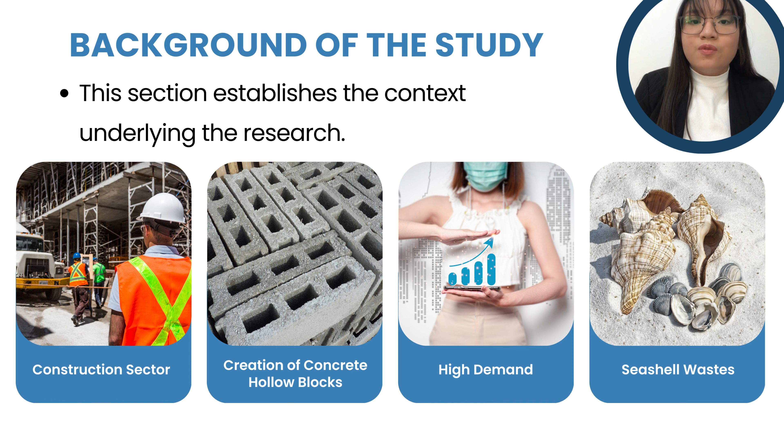The theoretical framework will be presented by Ms. Iana. The building and construction sectors have been striving to adopt environmentally friendly practices to reduce their environmental impact. Consumer interest in sustainable business has grown, and people are increasingly considering the environmental consequences of their choices. The study aligns with the theory of green purchase behavior, which explains how consumers select eco-friendly products based on their past behavior for sustainability. In this context, the researchers utilized recycled seashell waste as a step towards producing eco-friendly materials.

Our conceptual framework will be presented by Mr. Charlemagne. Let us proceed to the conceptual framework. The conceptual framework for the study on seashell waste concrete hollow blocks as an alternative to commercial concrete hollow blocks follows the IPO format, representing input, process, and output.

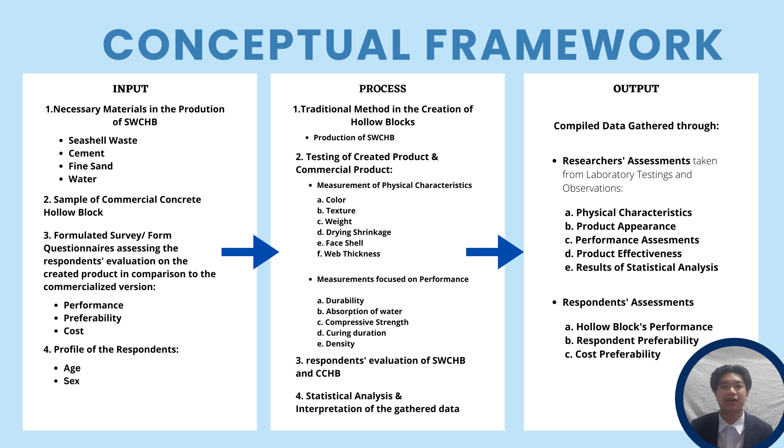The first is the input. We'll first need the necessary materials that we need in the production of SWCHB, or seashell waste concrete hollow block. These materials include fine sand, cement, water, and most importantly, seashell waste. Number 2, we will need a sample of CCHB, or commercial concrete hollow block, and this sample will be used later on in the process of the study.

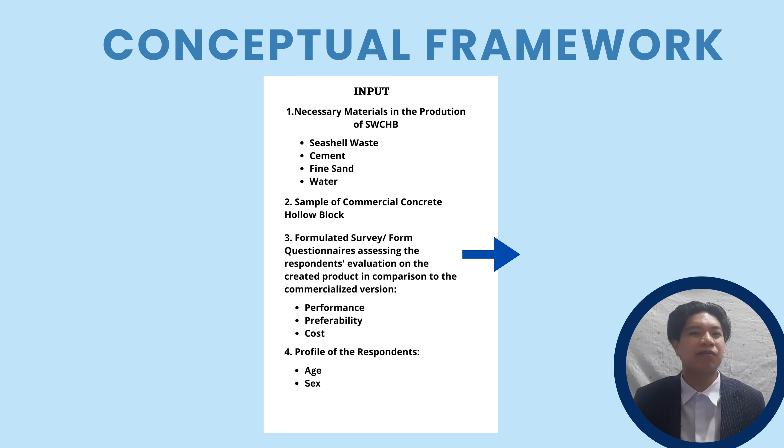Number 3, we will be formulating surveys or form questionnaires that will be assessing the respondents' evaluation of the created product, or SWCHB, in comparison to the commercialized version, or CCHB. The respondents will be evaluating the two in terms of their performance, preferability, and cost. Finally, we will have the profile of the respondents, which includes their age and sex.

Proceeding with the process, we start off with the traditional method of the creation of hollow blocks. The method will be used in the production of SWCHB. In the process, we will also test and compare the created product, SWCHB, and the commercial product, or CCHB. We will be taking measurements of both products, measuring their physical characteristics, such as color, texture, weight, drying shrinkage, face shell, and web thickness.

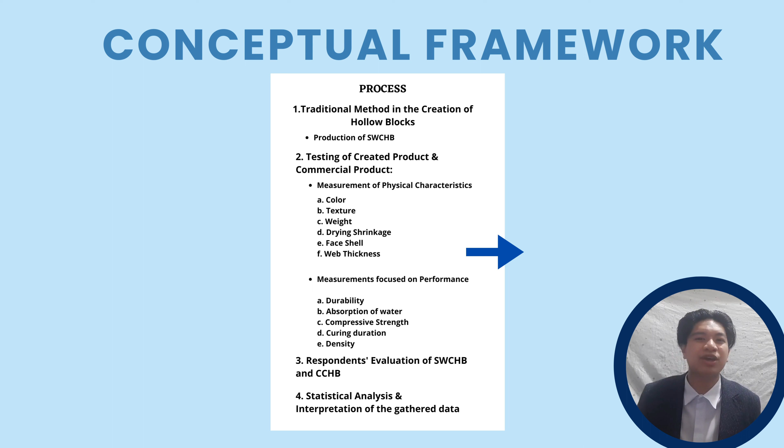We will also be measuring both, focused on performance like durability, absorption of water, compressive strength, curing duration, and finally, density. Third, we will be giving and getting our respondents' evaluation of SWCHB and CCHB, and finally, we will be getting the statistical analysis and interpretation of the gathered data.

Lastly is the output. The output will mainly be on the compiled data gathered through the researchers' assessments and respondents' assessments. The researchers' assessments will be taken from laboratory testings and observations of physical characteristics, product appearance, performance assessments, product effectiveness, and results of statistical analysis.

On the other hand, the respondents' assessments will be taken from the results of the surveys or questionnaires from respondents, which will comprise of their evaluations of the hollow block's performance, respondent preferability, and cost preferability.

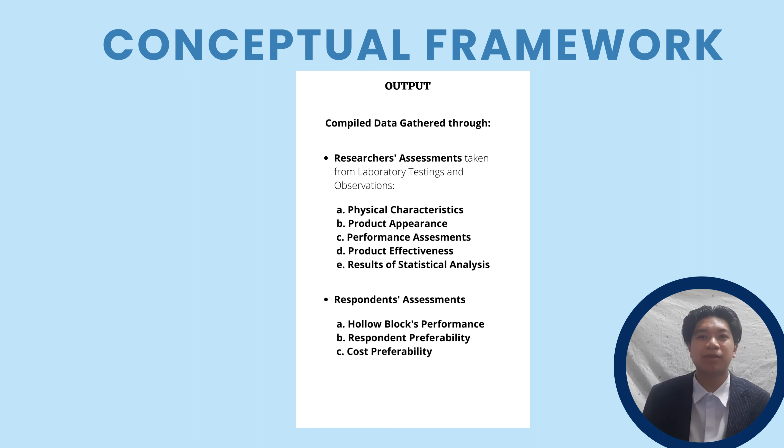The next to be presented is the statement of the problem, to be presented by Mr. Neil Dayupay. This study aims to determine if hollow blocks made from various types of seashell waste may be used as an admixture for a low-cost hollow block and alternative for a commercial concrete hollow block, CCHB. The study also seeks to evaluate which type of concrete hollow blocks is the most efficient in terms of product quality, consumer preference, and cost efficiency.

Proceeding with the research questions, to be started by Ms. Rithiel Valino. The following research questions were constructed by breaking down the main problem of the study into specific problems. The first research question focuses on the procedures that the researchers followed in gathering and preparing the primary ingredient of the seashell waste concrete hollow block, or SWCHB, which is the seashell waste.

The second question refers to the procedures in making the SWCHB and the commercial concrete hollow block, or CCHB. Third, the researchers seek to know which treatment produced the best outcome by measuring the product's durability, absorption of water, curing duration, and density. Fourth, the researchers also seek to determine the differences and similarities between the physical characteristics of the SWCHB and CCHB in terms of color, texture, weight, drying shrinkage, face shell, and web thickness.

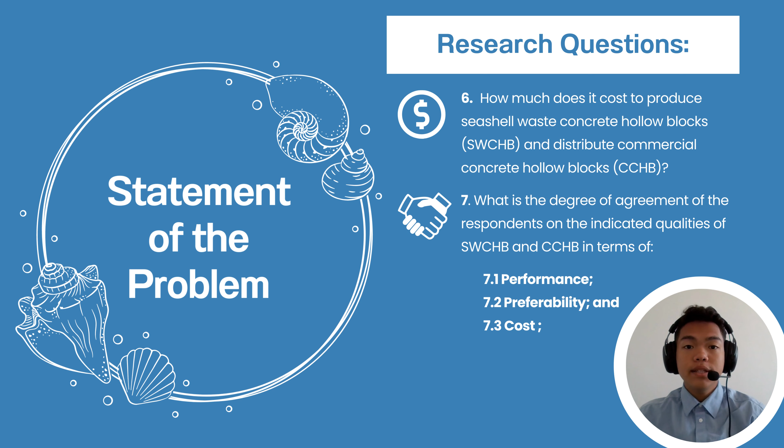Seventh, what is the degree of agreement of the respondents on the indicated qualities of SWCHB and CCHB? Qualities that is about performance, preferability, and cost. Eighth, is there a significant difference between the degree of satisfaction of the respondents based on the qualities of hollow blocks with an admixture of seashell waste, or SWCHB, and commercial concrete hollow blocks, CCHB?

Moving on to the hypothesis, which would be presented by Mr. George Tolentino. The research study compares the performance, preferability, and cost of hollow blocks with an admixture of seashell waste to that of a commercial concrete hollow block. The hypothesis suggests that there will be no significant difference between the two types of blocks.

Surveys will be conducted among potential users to gather their ratings and opinions. The data analysis will determine if the seashell waste admixture is a viable and cost-effective alternative.

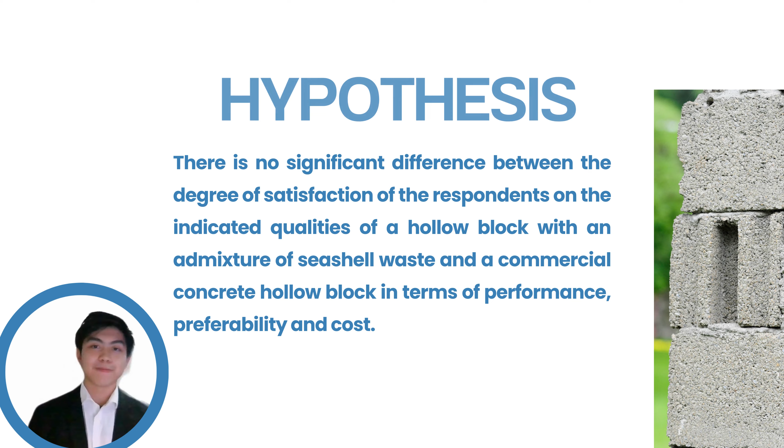Now moving on to the significance of the study, presented by Mr. Sean Pincena. The research study has significant benefits for various groups. It offers concrete hollow block manufacturers new variants for mass production and cost reduction. The construction industry can utilize seashell waste concrete hollow blocks, reducing material costs and enhancing structural performance.

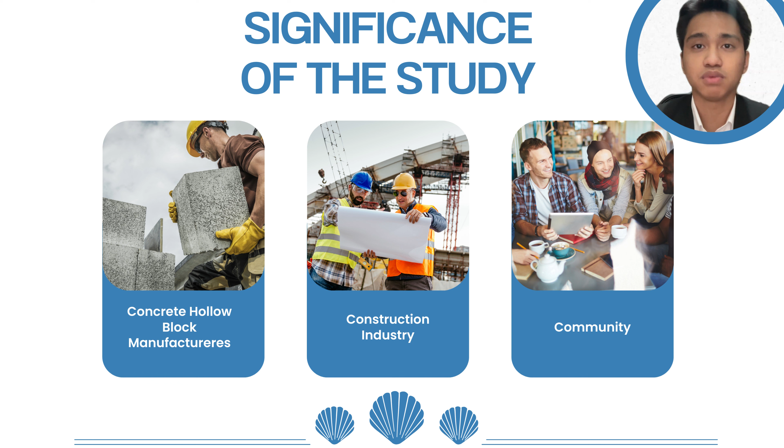The community benefits from waste reduction and prevention of odors and microbial issues. Homeowners can efficiently reuse seashell waste, reducing costs and potentially starting businesses. Future researchers can use this study as a valuable reference for related topics on seashell waste and concrete hollow blocks.

The scope and delimitation of our study will be presented by Mr. Adrian. The scope of this study focuses on developing a seashell waste concrete hollow block as a substitute for commercial concrete hollow block. The study aims to assess the products' effectiveness, qualities, and characteristics through laboratory tests, observational tests, and surveys.

The laboratory tests will include compressive strength, thermal conductivity, water absorption, and acoustic absorption. Meanwhile, physical characteristics will be attained through observational tests. Furthermore, survey questionnaires will be used to determine the degree of agreement of respondents on performance, preferability, and cost.

The delimitation of the study are as follows. The study is limited to the data gathered from the laboratory tests, observational tests, and research surveys conducted by the researchers. The response of the research surveys are limited to 15 males and 15 females residing in Qatar, aged 18 to 60, who are precisely acquainted with testing and evaluating concrete hollow blocks. The research timeline is limited to the first and second semesters of the school year 2022 to 2023.

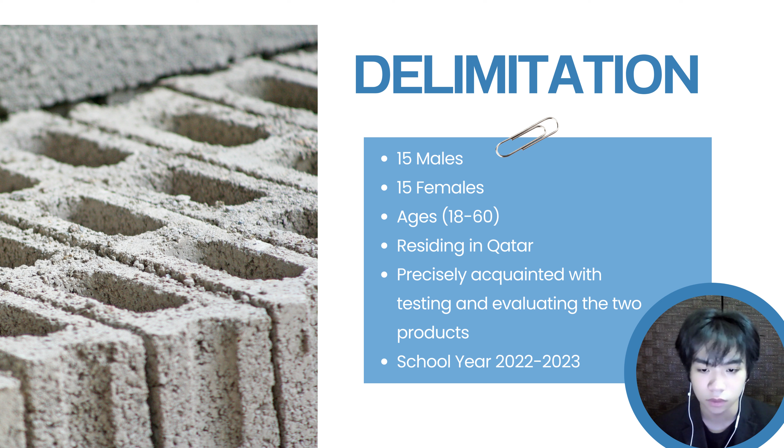As we move forward with our study's presentation, let us now shift our focus to the third chapter, which is all about research design and methodology.

The experimental method allowed the researchers to manipulate the independent variable, which is the formulation and production of seashell waste concrete hollow blocks, and examine its effect on the dependent variable, which is the performance of the hollow blocks in the construction industry. The study involved laboratory testing, evaluation by selected respondents, statistical analysis, and comparison of the results.

The locale of the study will be presented by James Binyas and Lance Tolentino.

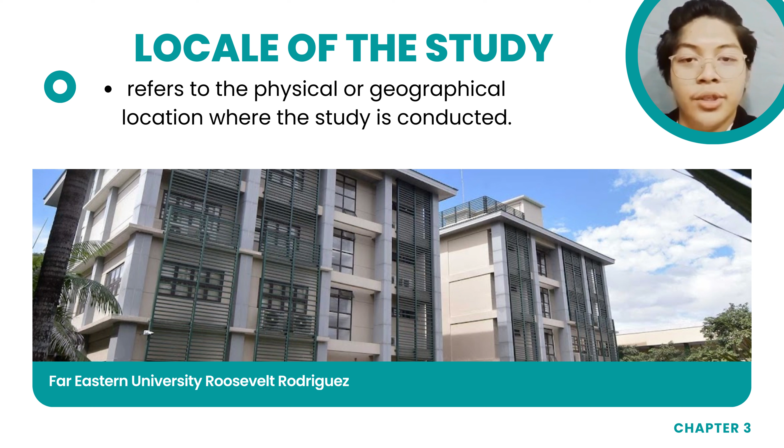Provided that we are enrolled at Far Eastern University, Roosevelt Rodriguez, the study was conducted in an online setup by offshore students stationed in Qatar and UAE. Specifically, the study was done in the Qatar Satellite Campus.

The seashell waste concrete hollow block (SWCHB) were formulated and produced in one of the locations set by the researchers to meet. Residing in Qatar, the researchers used one of the members' houses with an appropriate outdoor space to formulate and produce their desired product at Yasmin Gardens.

To ensure reliable and credible data, the study utilized Doha Technical Laboratories (DTL) in Qatar for testing the product. DTL is a renowned laboratory in the construction sector, offering a range of testing services for various construction materials.

The respondents of the study will be discussed by Mr. Adrian. Respondents of the study.

In this study, the researchers have selected respondents from Qatar who possess knowledge or experience related to the study. The study will involve a total of 30 respondents, 15 males and 15 females, ranging from 18 to 60 years old. The researchers employed purposive and availability sampling techniques. Purposive sampling involves selecting participants based on specific criteria, while availability sampling involves gathering data from readily available individuals.

The researchers' instruments will be represented by Ms. Ian. Three research tools will be used to gather the necessary data for this investigation. The instruments that the researchers will use include an observational assessment or checklist, laboratory testing, and a survey questionnaire.

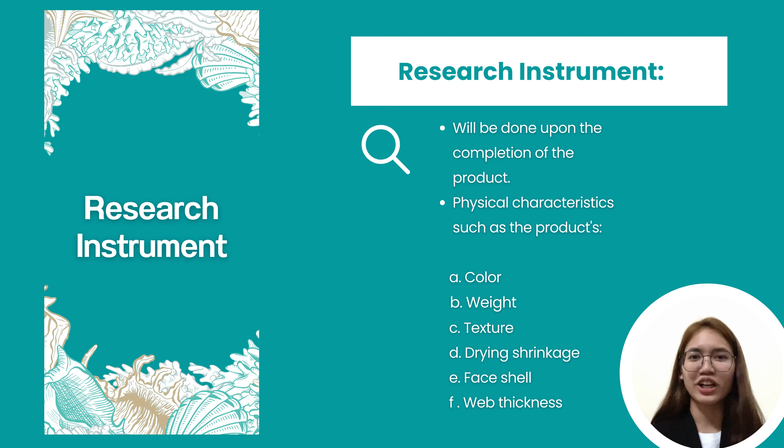The researchers conducted laboratory testing to gather quantitative data on the performance of seashell waste concrete hollow blocks and commercial concrete hollow blocks. This testing was carried out in a laboratory in Qatar with the assistance of a knowledgeable professional.

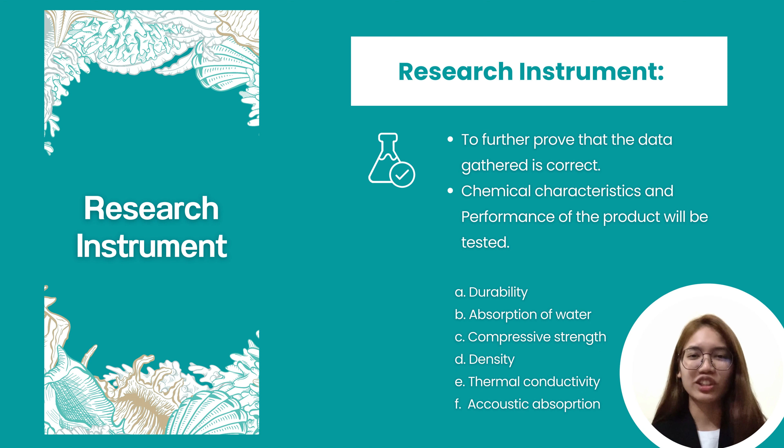To gather feedback and evaluations from respondents, survey questionnaires were utilized. The questionnaires were divided into two sets, one for each product, which is commercial concrete hollow blocks and seashell waste concrete hollow blocks, allowing the researchers to compare them.

The questionnaire consisted of 15 affirmative statements, and respondents indicated their agreement or disagreement on a scale of 1 to 5. This helped determine the respondents' level of agreement with the performance, preferability, and cost of the two types of blocks.

The data gathering procedure will be presented by Ms. Razan. To produce seashell waste concrete hollow blocks, the researchers gathered seashell waste, water, fine sand, and cement. Seashells were obtained from beaches or restaurants, while water, sand, and cement were obtained commercially or through natural extraction.

The production process involved sterilizing and washing the seashells, powdering them, and mixing them with a dry mixture. The wet and dry mixtures were then combined in a mold to form the hollow blocks, which were cured for 28 days. After curing, the physical characteristics of the seashell waste concrete hollow blocks were observed and compared to the commercially produced concrete hollow blocks.

Specific factors such as water absorption, compressive strength, and thermal conductivity require specialized tools and instruments to assess the performance of seashell waste concrete hollow blocks. Therefore, the researchers have identified a laboratory that can provide the necessary equipment and materials for testing.

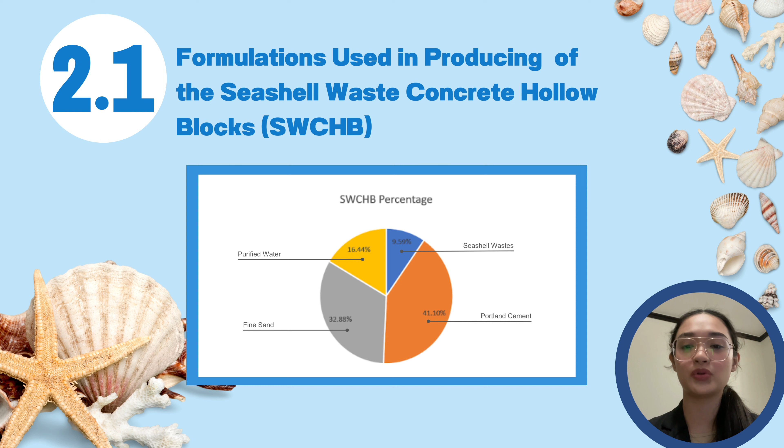7 kilograms of seashell waste were utilized to achieve the desired product, ensuring its ability to produce a satisfactory performance in the construction industry. The said ratio produced 3 to 4 SWCHBs, and in total, the researchers produced 11 SWCHBs by using the ratio thrice.

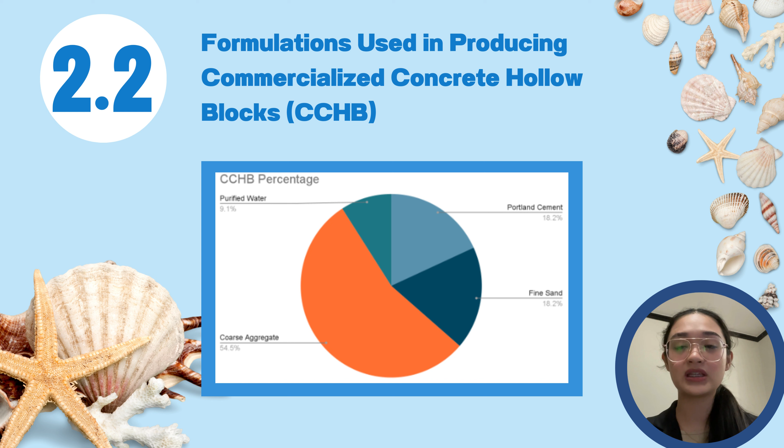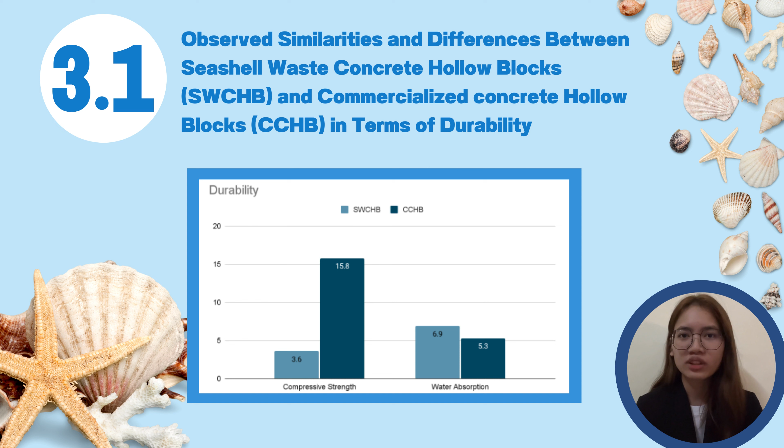Additionally, the graph shows us the percentage of water absorption of SWCHB and CCHB, which is 6.9% and 5.3% respectively, which meet the standard specifications for concrete hollow blocks. A block with a higher compressive strength is more durable than one with lower compressive strength because it can support more weight, and a block with a low water absorption rate is more durable and will endure longer than a block with a high absorption rate.

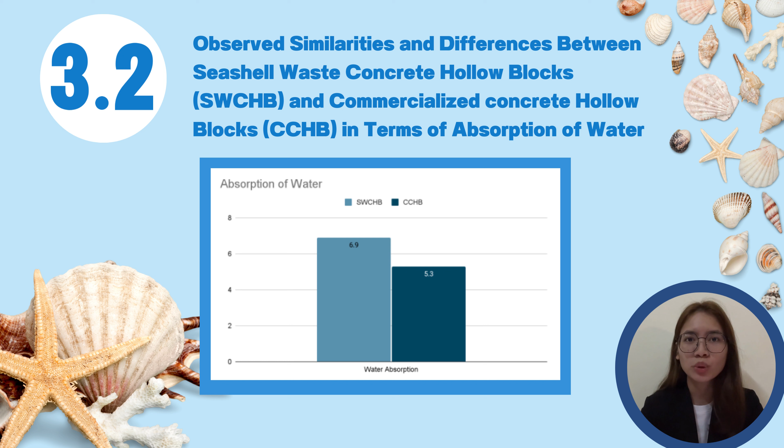The graph presents the measured ability of SWCHB and CCHB in water absorption, which refers to the amount of water a concrete hollow block can hold after being soaked. Shown in the graph is the average water absorption of SWCHB, which is 6.9%, and CCHB, which held 5.3%. The test results were obtained through laboratory testing, specifically by administering the test method for full water absorption of concrete masonry units in Doha Technical Laboratories.

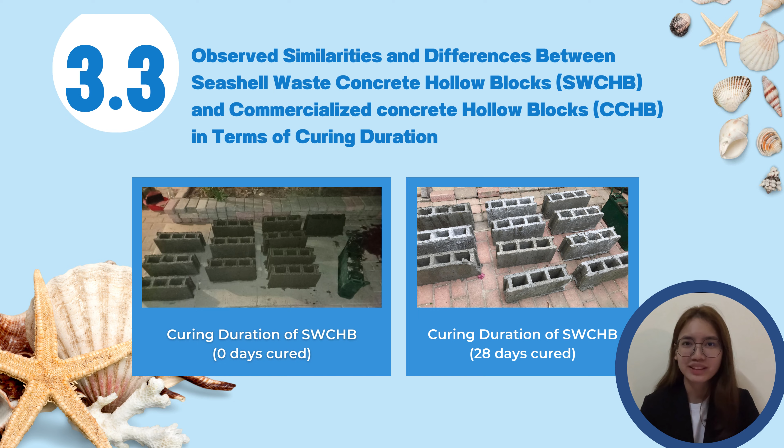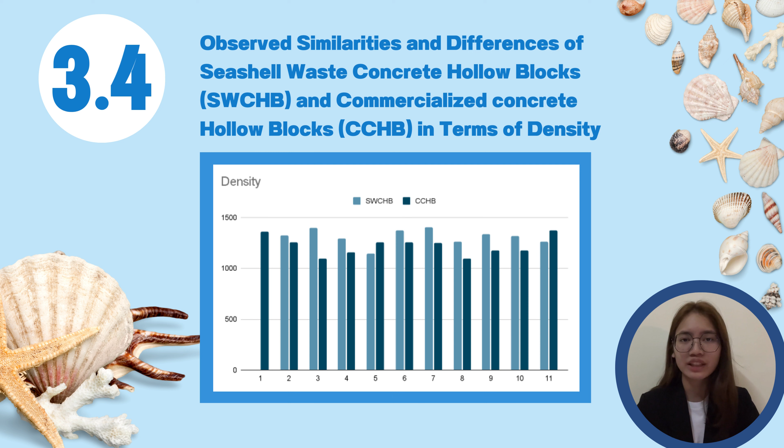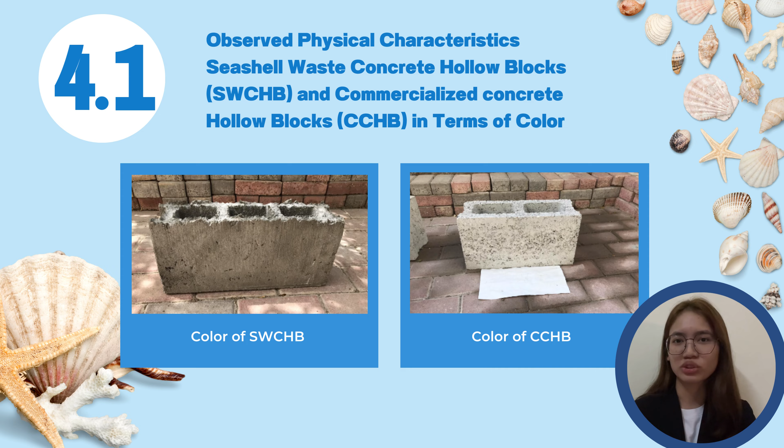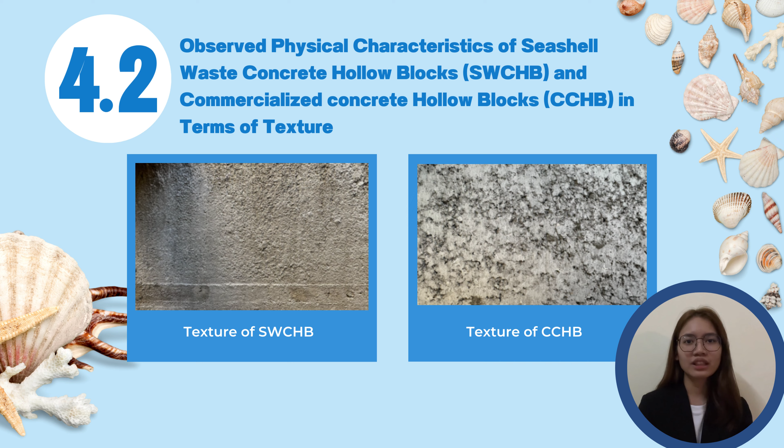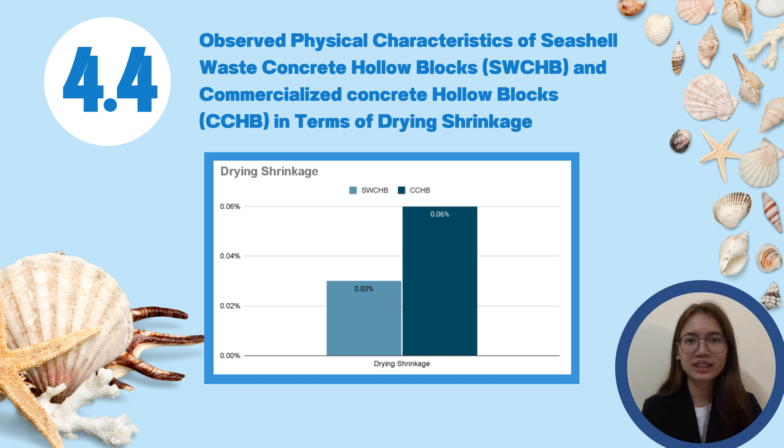This graph represents the data of the observed physical characteristics of the seashell waste concrete hollow blocks and the commercialized concrete hollow blocks in terms of their respective drying shrinkage. The diminution in volume or the size of the hollow blocks that happens during the drying process is referred to as the drying shrinkage. As shown in the graph, the drying shrinkage of the seashell waste concrete hollow blocks is 0.03%. On the other hand, the drying shrinkage of the commercial concrete hollow block is 0.06%, which is higher.

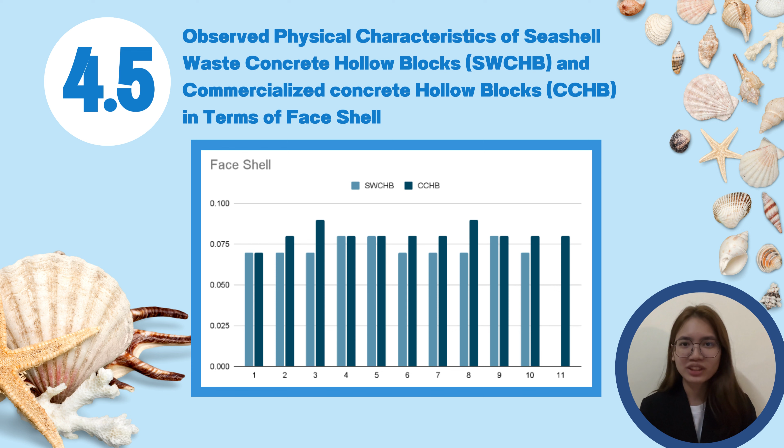This graph showcases the documented measurements of the two products, the seashell waste concrete hollow block and the commercialized concrete hollow blocks. Since the two products are made from two different types of molds, they are expected to differ in measurements. The seashell waste concrete hollow block mold is initially based in the Philippines, with 3 equal cavities. The commercialized concrete hollow blocks are based on the standardized model.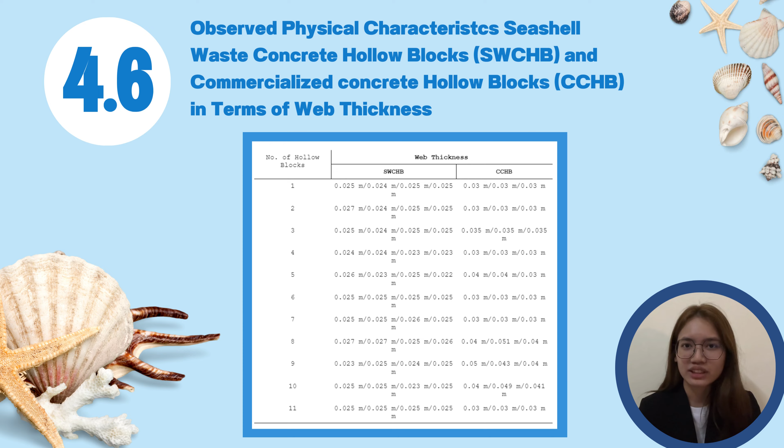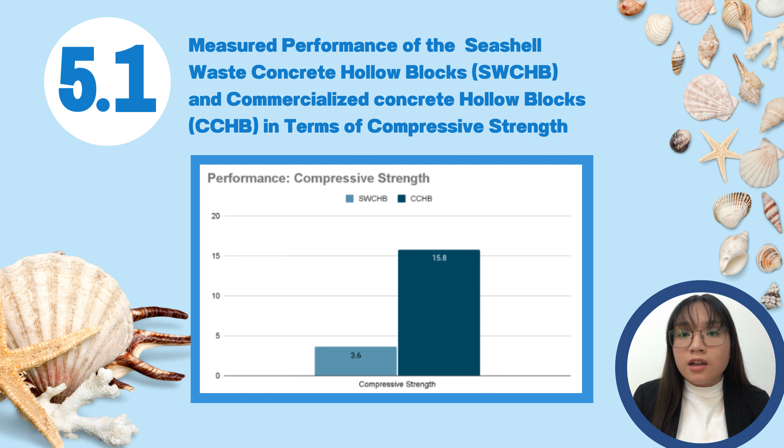Starting with Table 5.1, it illustrates the compressive strength of both hollow blocks. Compressive strength is a property that evaluates a material's capacity to sustain applied compressive loads without failing, and is tested using the standard BS EN 772-1. Therefore, an increase in compressive strength would be more acceptable. And according to our data, the CCHB had a compressive strength of 15.8 Newtons per square millimeter, while the SWCHB had a compressive strength of 3.6 Newtons per square millimeter. Therefore, the commercial concrete hollow blocks demonstrated higher compressive strength when compared to the seashell waste concrete hollow blocks.

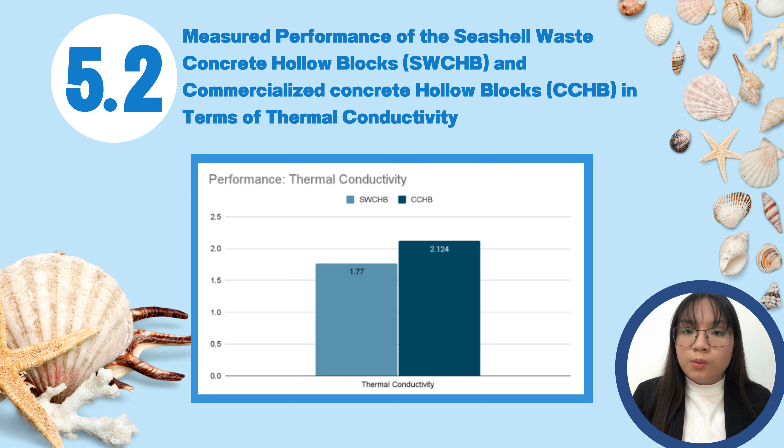On the other hand, Table 5.2 depicts the thermal conductivity of both concrete hollow blocks. Thermal conductivity refers to the ability of the concrete hollow blocks to absorb heat with regular exposure to the sun and lights, and is tested using the standard ASTM D5334. A concrete hollow block with a low thermal conductivity would suggest the material would resist heat transfer. With our data, it is apparent that SWCHB exhibited a greater performance in the thermal conductivity of 1.770 watts per meter per degree Kelvin compared to the CCHB of 2.124 watts per meter per degree Kelvin.

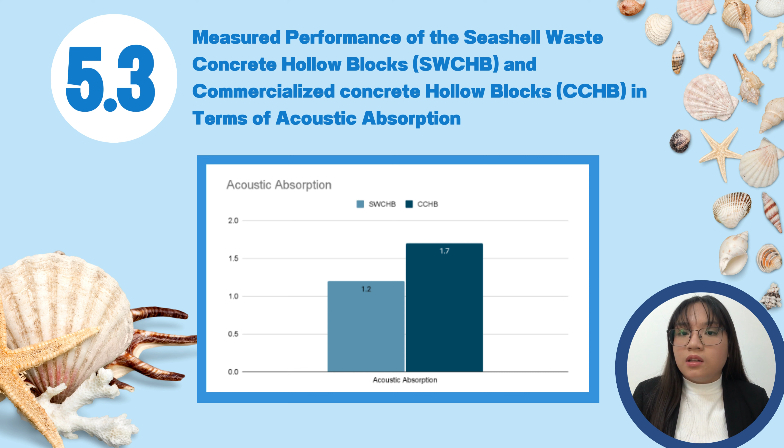Lastly, Table 5.3 illustrates the acoustic absorption of the concrete hollow blocks. The hollow block's capacity to decrease or lessen the transmission of sound waves by absorbing some sound energy is known as acoustic absorption. It is measured using BS EN 12504-4 or the ultrasonic pulse velocity. In the case of a concrete hollow block, high acoustic absorption is desirable. It would suggest that the material can reduce the amount of sound that reflects into a space, thereby reducing the overall noise level and improving the acoustic environment. Evidently, CCHB performed more significantly in terms of acoustic absorption with 1.7 km per second than SWCHB with 1.2 km per second.

Our sixth research question focuses on the cost analysis of both SWCHB and CCHB. After analyzing the prices of the components used in each hollow block sample, the cost to produce an SWCHB is significantly lesser than the CCHB, with the SWCHB only paying for the prices of the Portland cement and fine sand, and the CCHB's need for bulk purified water caused the cost difference. The cost difference is 1,010 Qatari riyals. The price to sell an SWCHB is 2 Qatari riyals per hollow block. On the other hand, the CCHB's price is 3 Qatari riyals per hollow block. Hence, the SWCHB is more affordable than CCHB.

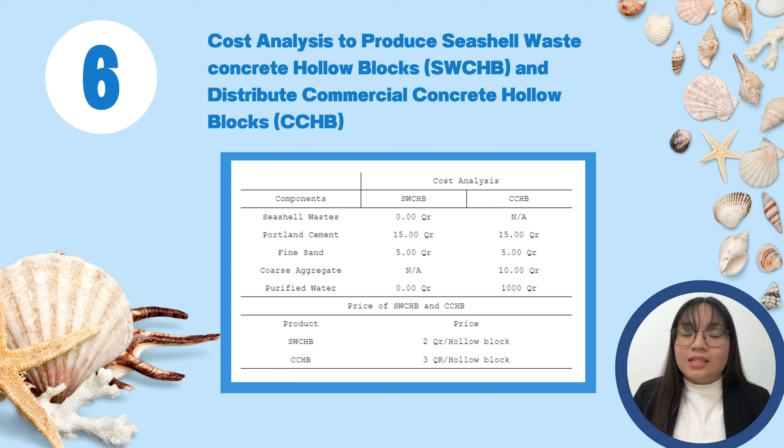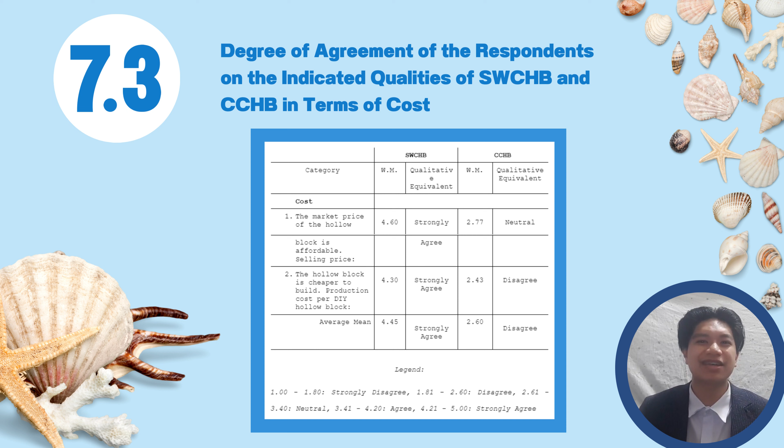Lastly, Table 7.3 illustrates the respondents' degree of agreement on the indicated qualities of SWCHB and CCHB regarding cost. In terms of cost, the degree of agreement of the respondents on the indicated qualities of SWCHB and CCHB showed that the respondents strongly agreed that the market price and the production cost of the SWCHB were cheaper to build and was affordable. On the other hand, the results of the evaluation showed that the respondents disagreed that the market price and the production cost of the CCHB were cheaper to build and affordable.

For Table 8.1, after computing the respondents' evaluation results, the computed t-value or t-statistic is 3.60 and thus lies within the rejection region. So, the null hypothesis is rejected. Therefore, there is a significant difference between the degree of satisfaction of the respondents on the indicated qualities of a hollow block with an admixture of seashell waste and a commercial concrete hollow block in terms of their performance. Since the computed Cohen's d is negative 3.06, there is also a large practical significance of the gathered and computed data regarding the weighted mean score differences between the SWCHB and the CCHB in terms of their performance.

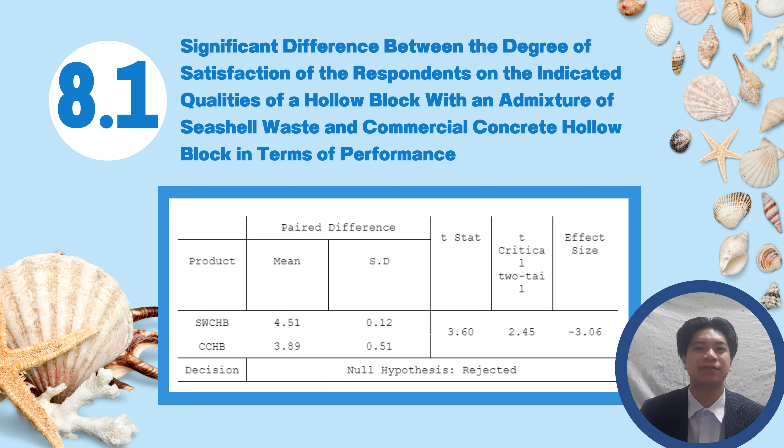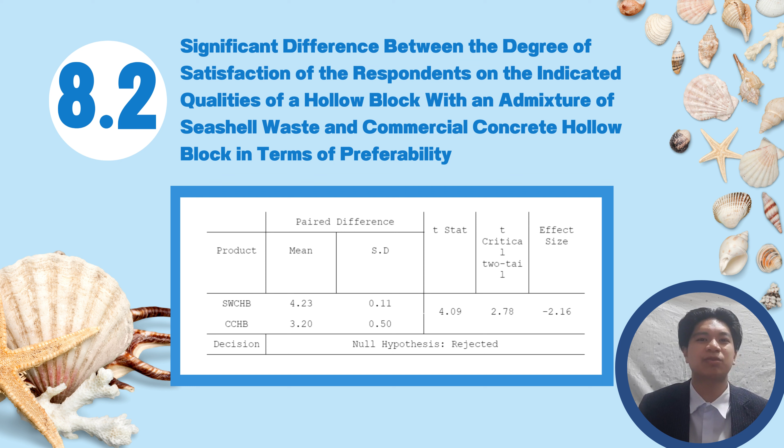For Table 8.2, the null hypothesis is rejected since the computed t-value or test statistic is 4.09 and thus lies within the rejection region. Therefore, there is also a significant difference between the degree of satisfaction of the respondents on the indicated qualities of a hollow block with an admixture of seashell waste and a commercial concrete hollow block in terms of preferability. Since the computed Cohen's d is negative 2.16, there is also a large practical significance of the gathered and computed data regarding the weighted mean score differences between SWCHB and CCHB in terms of their preferability.

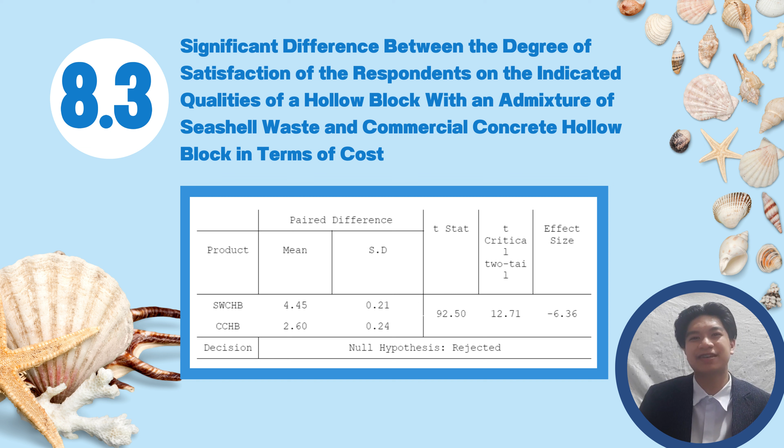Lastly, for Table 8.3, in terms of cost, after computing the respondents' evaluation results, the computed t-value or t-statistic is 92.5 and thus lies within the rejection region. Therefore, the null hypothesis is rejected. Therefore, there is also a significant difference between the degree of satisfaction of the respondents on the indicated qualities of a hollow block with an admixture of seashell waste and a commercial concrete hollow block in terms of cost. Since the computed Cohen's d is negative 6.36, there is also a large practical significance of the gathered and computed data regarding the weighted mean score differences between the SWCHB and CCHB in terms of their cost.

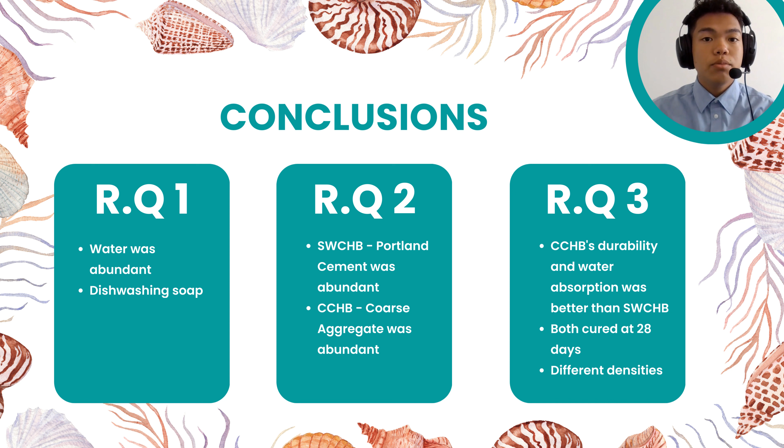Our Chapter 5 contains summary and recommendation. Summary will be presented by Mr. Mark. Our Chapter 5 contains the conclusion and recommendation. So now moving on to the conclusion for each research question. Research question number 1. The formulation for the preparation of seashell waste mostly involved using water for the soaking and rinsing of the shell, while dishwashing soap was used for thorough cleaning. Research question number 2. SWCHB contained Portland cement as the most abundant component, while CCHB used coarse aggregates. Number 3. CCHB showed better durability with higher compressive strength and lower water absorption.

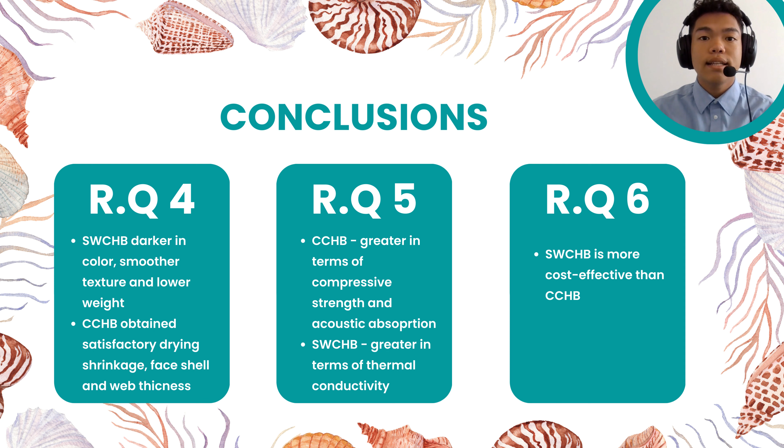Number 4. SWCHB had a darker color, smoother texture, and lower weight, while CCHB had better drying shrinkage, a more prominent face shell, and wider web thickness. Number 5. CCHB performed better in terms of compressive strength and acoustic absorption, while SWCHB had excellent thermal conductivity. Number 6. SWCHB was more cost efficient according to the cost analysis. Number 7. Respondents agreed that both products had the right durability, fire resistance, and size, but they preferred the smooth texture and lower cost of SWCHB. And lastly, number 8, the evaluation results rejected the null hypothesis, indicating differences in performance, preference, and cost between SWCHB and CCHB.

Now proceeding to the recommendations, which will be presented by Mr. Sean Princena. Recommendations. The researchers have provided the following recommendations based on their findings. Seashell waste can be utilized by concrete hollow block manufacturers to replace coarse aggregates, reducing production costs and addressing environmental concerns. The construction industry can benefit from incorporating seashell waste, leading to improved thermal conductivity and enhanced performance. Coastal communities are recommended to use seashell waste in block production, contributing to waste reduction and offering business opportunities.

Homeowners can consider using seashell waste concrete hollow blocks for better thermal conductivity and affordability. Future researchers should follow its standard ratios, conduct durability tests, and explore properties for accurate grading and data analysis. Moreover, that ends our study entitled Seashell Waste Concrete Hollow Blocks as an Alternative to Commercial Concrete Hollow Blocks. The researchers are now ready for your comments, suggestions, and constructive criticism for the betterment of this study.